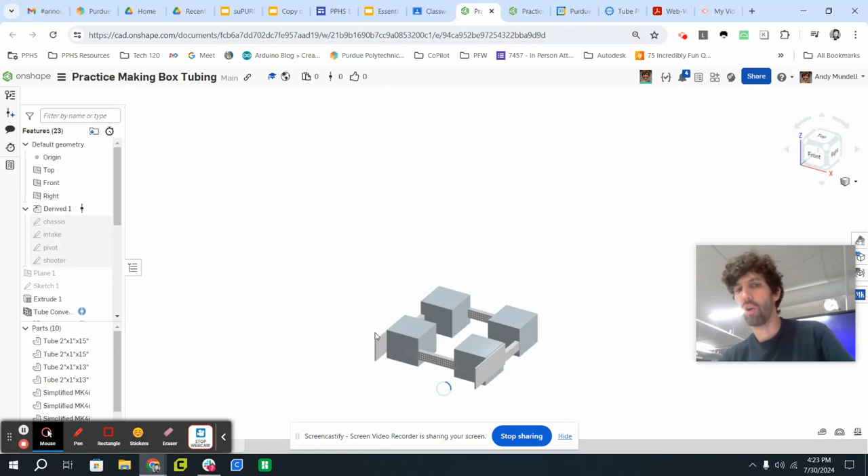So there's a starting file here, which you're gonna click to open. It'll take a moment to open. It's really a chassis that we made for the 2024 off season. Don't want you messing with this file because we're gonna have multiple people working on it.

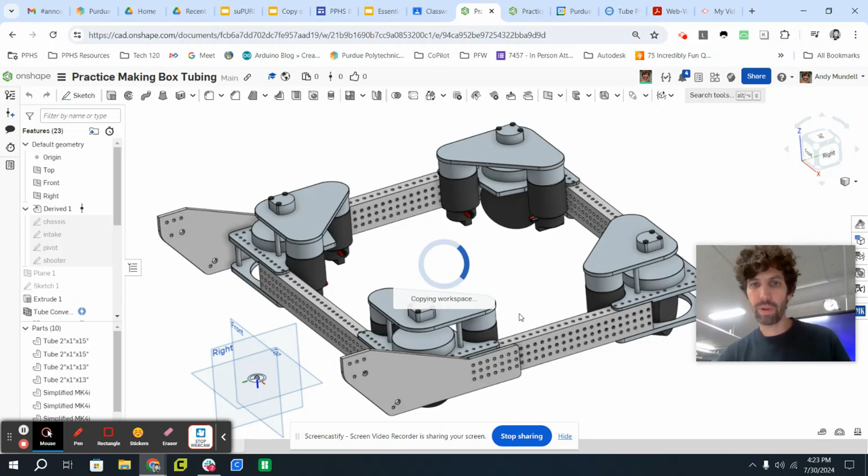So up here, you hit the hamburger looking thing and select copy workspace. And you can copy it, create it wherever you want it. I'll put it in the owned by me. Copy it right there. Once you've copied it, you should be able to edit it at that point.

We're going to make two pieces of box tubing. The first one is across the very front of the robot. It'll connect these three holes here in the front with these three holes across the other side. We'll make this out of 2x1.

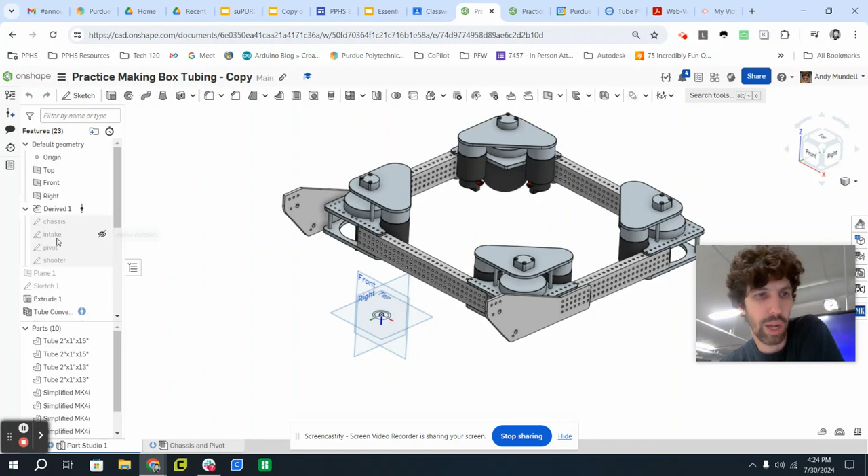The first thing I want to show you, though, is at the very beginning of the whole part studio, up at the very top, the first thing that gets done, you can see here, derived 1, is that 4 sketches were brought into this workspace. Let me go ahead and make them visible. Let me go ahead and hide all my parts. I'm going to right-click a part and select Hide All Parts.

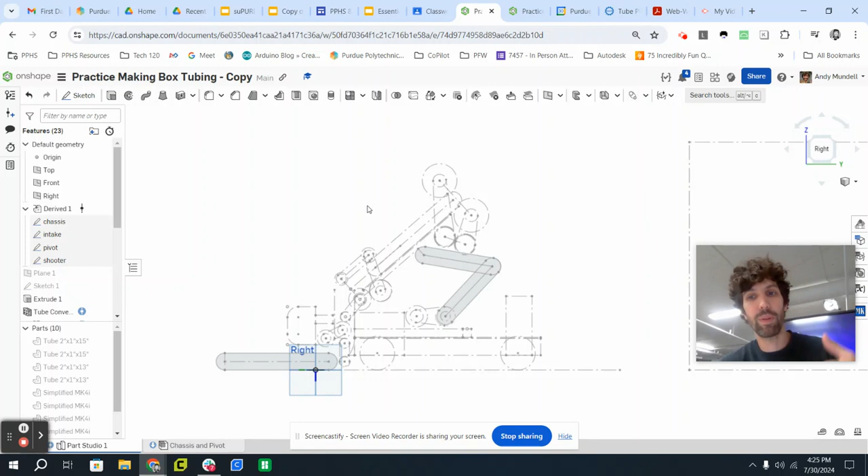So you can see these sketches were made after we decide how the robot overall will look. We'll create these 2D sketches which lay out where everything's going to be. This is really useful because that way all of our subsystems can use some of the same sketches. We can make sure they fit together. And if we want to change something, we can often just change the sketch. And if people have derived the parts off of those sketches, it should update.

So let me go ahead and show you these. We have a chassis sketch. Let me hide the others. Here's the chassis. You can see there's 2 wheels and sort of the shape of the robot. Here's the front bumper. Here's the beam that we're going to make.

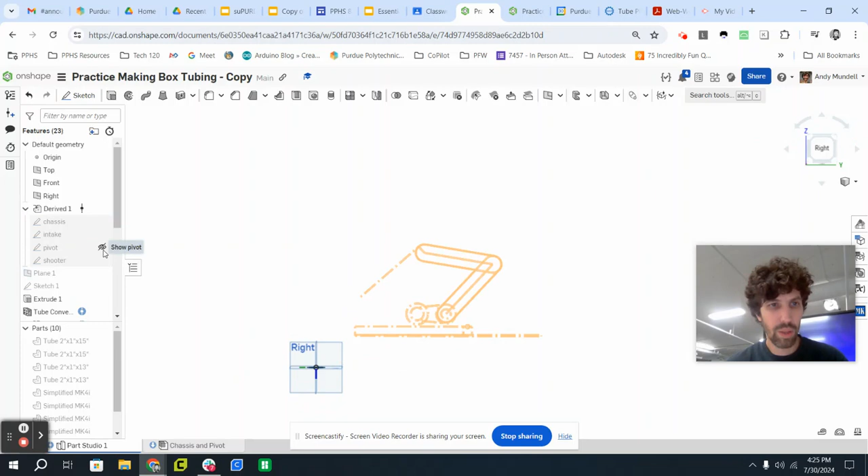Let me hide that. There's an intake sketch, shows you some of the geometry of our intake. There's a pivot where our shooter pivots on. And of course, there's our shooter. Let's just bring the chassis up here so we can see that. And then I will go ahead and bring all of my parts back. Let me right click and show all parts.

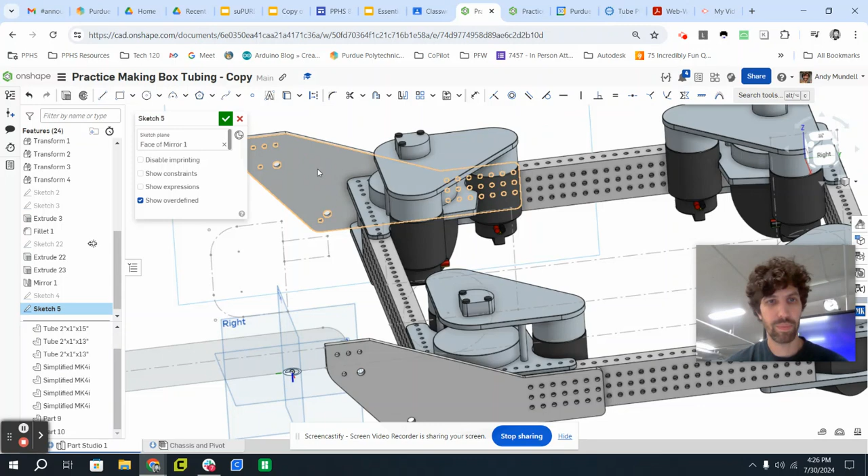There we go. So you can see that this part of the sketch represents a 2x1 box tube that's going to run across the front of the robot. So the way I'm going to build that is I'm going to leave this 2D sketch open. I'm going to start a new sketch on the front of this back plate. That's going to allow me to start drawing on that back plate.

You might think, oh, well, I'm going to draw this 2x1 box. I'm not going to do that, though, because I want it to be exactly where my 2D sketch is. So instead, I'm going to use this command, which is called use, project/convert. Now I'm going to project this line, this line right here, this line right here, and this line right here.

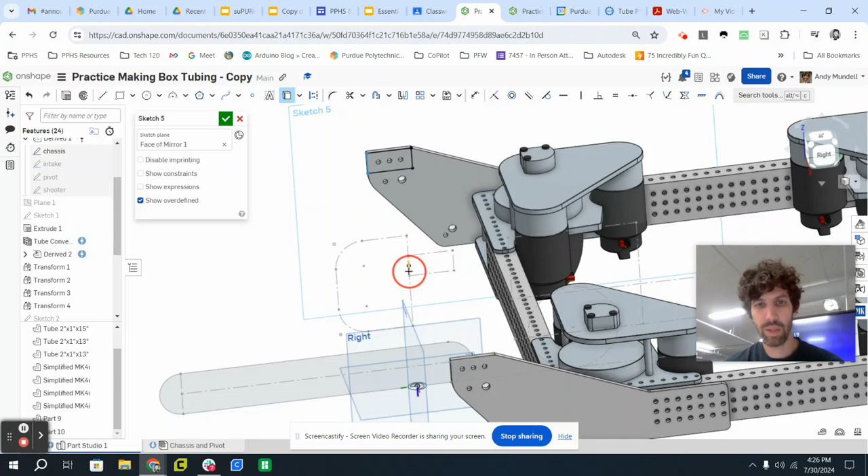I projected them. You can see they got projected onto this plane. Here's these black lines, which I've now used to enclose that area. And that way, if I later change the shape of this sketch, it will change that projection. I'm going to click the green check mark. I'm done with that sketch.

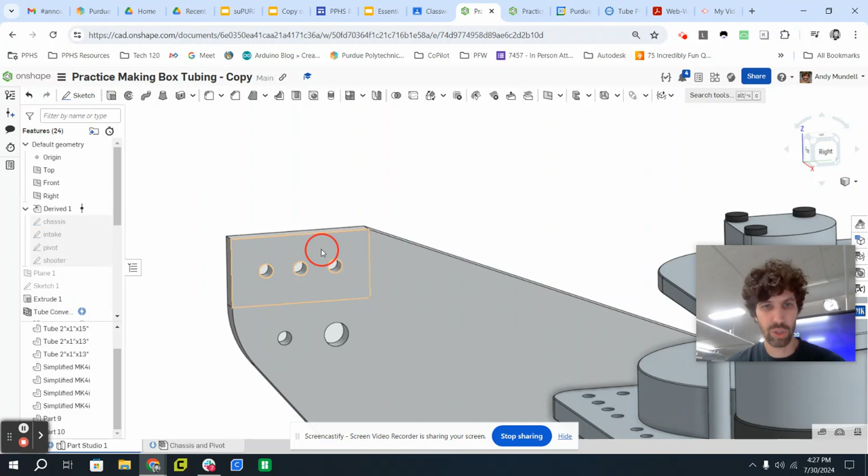At this point, I can hide my derived sketch, and I can just look at this piece I've got right here. This is what I'm going to extrude. So let me click that. I actually want to also select the areas inside these holes because I don't want to not project that area. I just want a solid block of 2x1.

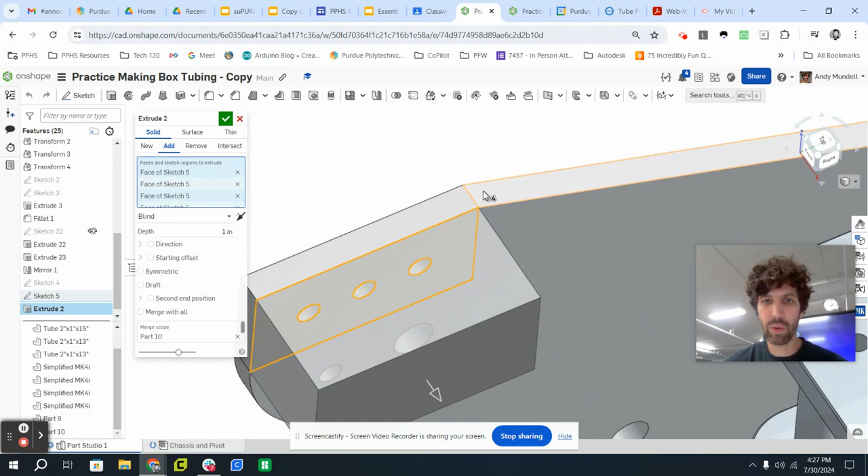I'm going to select extrude, and you'll see it'll start to extrude that block. If you have little holes here, it's because you missed selecting some of them. I want this to be a brand new piece. I don't want it to just be an extension of this plate. This is a whole separate piece. So instead of clicking add for this extrusion, I'm going to select new.

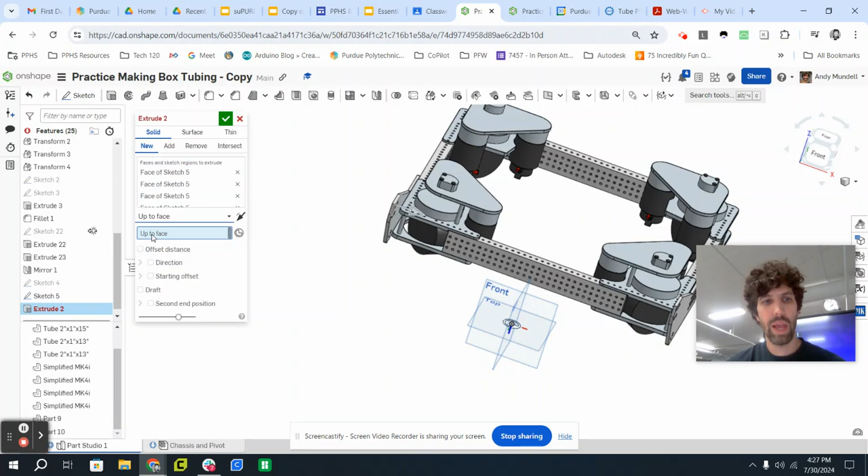And now how far do I want to project this? Well, I could measure this gap and say I want to project it 20 inches or whatever it is. But if I change my mind about how big this chassis is, I want it to change with it. So instead of just doing what's called a blind extrusion and saying the distance, I'm going to select up to face. And then I'm going to select this other side, this face, and it will extrude it up to that face.

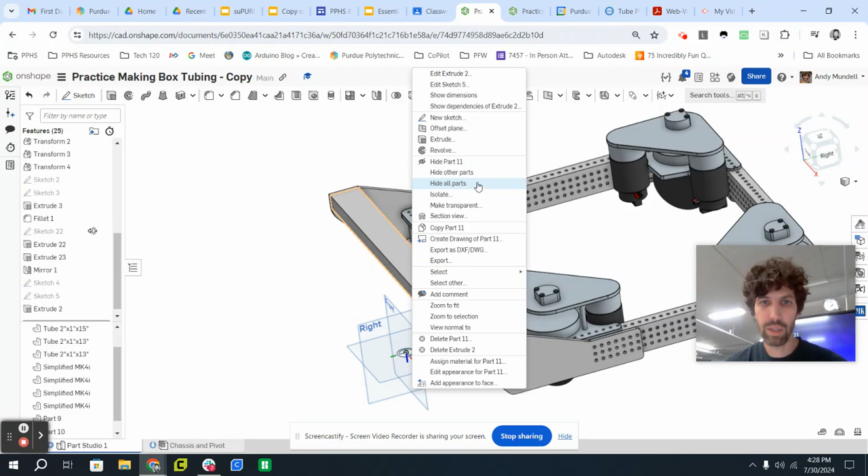And that's really convenient. If I go and change that later, it will adjust. Let me go ahead and click the green check mark. So here's my piece of aluminum box. Let me hide everything else. Right click, hide other parts. You can see what it looks like. It's 2 inches by 1 inch. It looks a lot like a piece of box tube. The main problem is that it's not hollow.

And this is where we can use what's called a feature script. Feature scripts are custom tools that have been designed by users of Onshape. And if I go back to the assignment here, you can see there's a file called Julia's feature scripts. Let me go ahead and open that.

Julia, I don't know what team you are from, but I wish I could meet you and shake your hand and thank you for some of these great feature scripts, because they've made our life much easier.

It'll take a moment to load up here because this file has a lot of great feature scripts. The one I'm concerned about is the tube converter feature script. Once it's taken a moment to load up, it's going to give me the option to add them. So you can see this is the code that Julia wrote. I am not a coder, so this is a little bit confusing to me. I don't need to know it, though. It works. I know it works.

I'm going to click plus on custom features. I'm going to scroll down to tube converter. I'm going to click tube converter. Now, for me, it said it was removed from your toolbar. That's because I already had it. For you, it would add it. So let's click it again. It was added to my toolbar. Great. So now I should have that feature script.

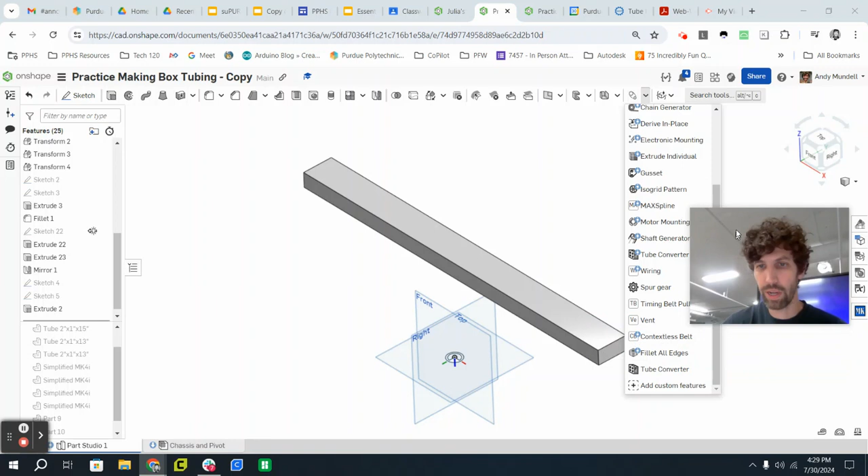Let me go back to my bar. So I want to turn this into a tube. I'm going to go here to my custom features, scroll all the way to the bottom. There's tube converter. You can see it's right here, tube converter. I'm going to click it. It's a custom tool for FRC. Bodies to convert. Well, that's going to be this body right here. Let me click it. Okay. You'll see it suddenly became hollow.

That's awesome. Wall thickness. It defaulted to 1/16 of an inch. I want this to be thicker, 1/8 of an inch, because this is on the outside of our robot, it could take some hits. So I want it to be a little bit stronger. I want there to be a hole pattern. I can take off the hole pattern if I want. Let's bring it back. And now I need to select some options about this hole pattern.

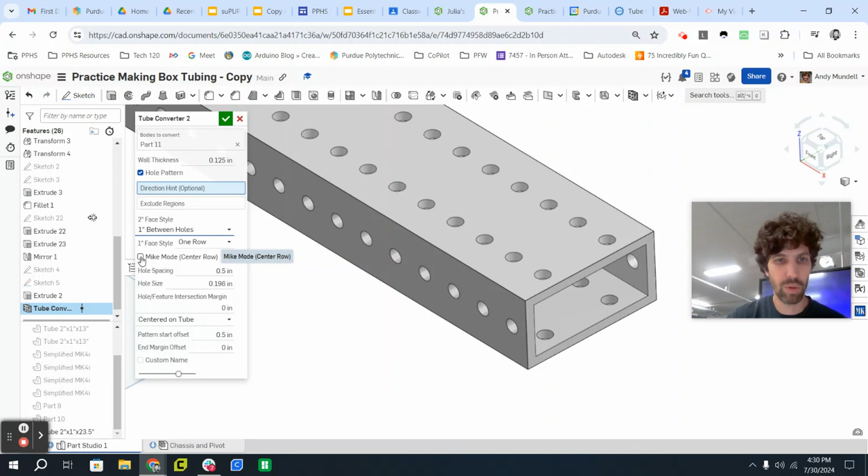On the 2-inch face, here we go. It says 1.5 inches between the holes. This is too far. We want 1 inch between the holes. Okay. And the other thing I want is a center row as well. So I'm going to check this box that says Mike mode, center row. There we go. This is very similar to the tube we have in our shop from ThriftyBot. You can also buy a similar pattern from West Coast Products, I believe, and maybe a couple other providers.

Hole spacing is every 1/2 inch. So they're doing a row of these every 1/2 inch. Hole size, 0.198. That's the size for a number 10 bolt. Sometimes we put 0.201 to give ourselves a little bit of clearance. Honestly, these tubes come with, I think, 5 millimeter. I could say 5 millimeter. They're all about the same size. They all work.

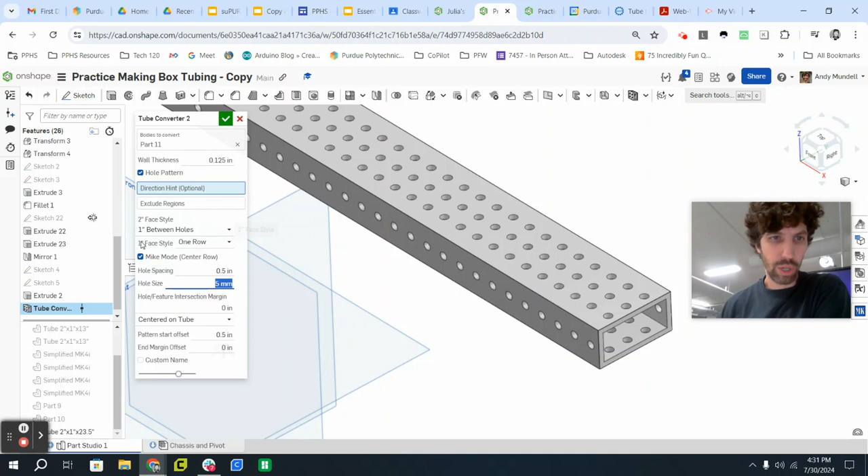But I just want to make sure all my settings are good. I can also adjust the 1-inch face. Right now it's set to 1 row. That's perfect. And then the last thing I need to worry about is the location of these holes.

Okay, so right now I need this hole here to be a 1/2 inch from the edge. And if I click right now, oh, it won't let me click because I'm in the middle. I can see that it's actually too close. It's a 1/4 inch. It did this because it tried to center the holes. You can see right here in the middle, it centered them. I'm not going to do that.

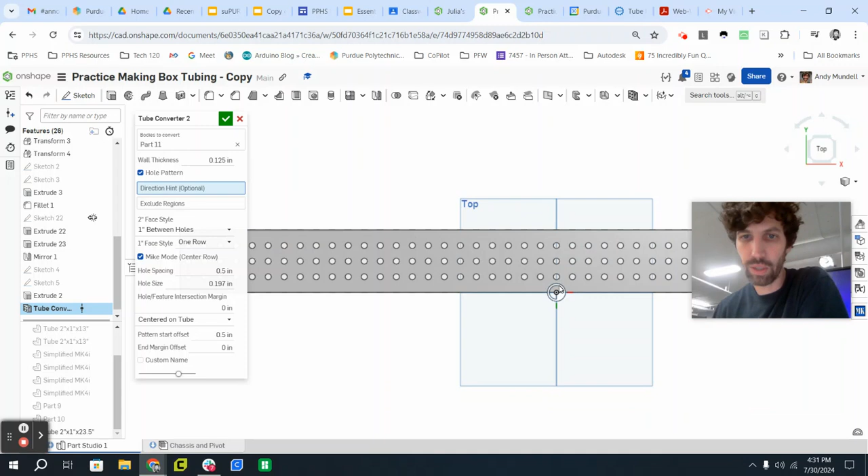Instead of having my holes centered on the tube, I'm going to select offset from the end. I'm going to offset them. I need to select the fixed face, which is this side here. From this face, I'm going to offset them 1/2 inch, 0.5. So you can see this is now a 1/2 inch in. I'm going to double check my other side. It appears to be a 1/2 inch over there as well.

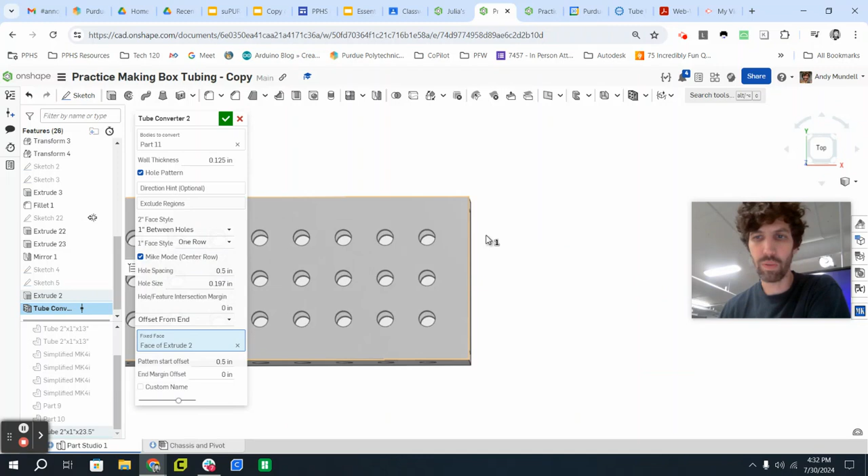This is important because I know how I'm going to use this tube. I'm going to put tube plugs in the ends, and they have a 1/2 inch depth. You can see tube plugs look like this. And the ones we use are a 1/2 inch from that edge. I'm going to click the green check mark. I'm all done. That tube looks good.

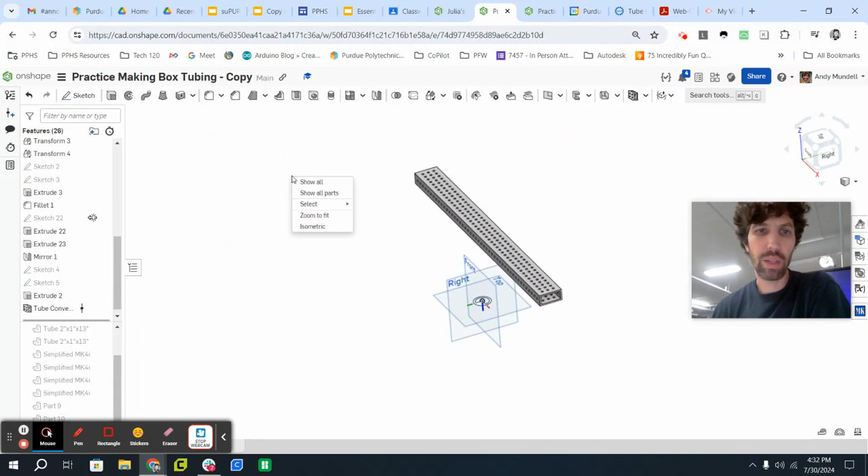Let's right click, show all parts. You can see we brought it back. That looks great. I'm going to be able to just put some number 10 bolts in here into the tube plug, fasten the tube plug into this piece of box tube. That's going to be nice and strong across the front.

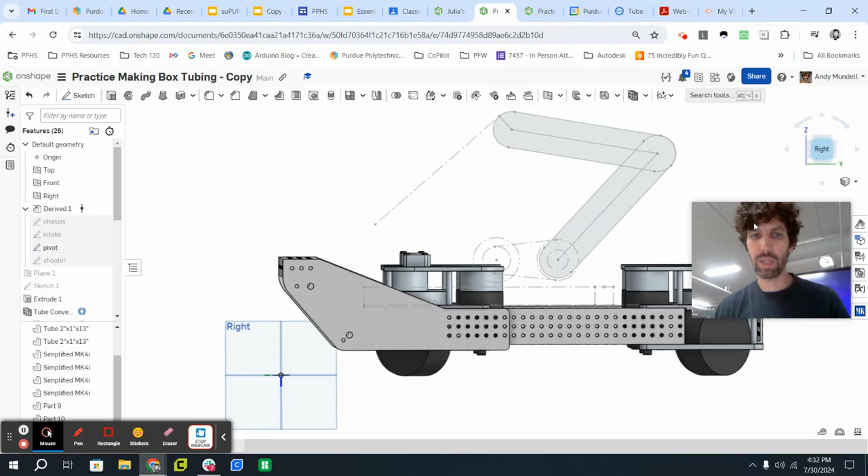All right, I'm going to do this one more time just to emphasize it. There's another tube that needs to be extruded here. It's part of the pivot sketch because it's one of the mounting pieces for that pivot. Here it is. It's a piece of 1x1 box tube. It's an 1/8 of an inch off of this edge because there is going to be space here for a belly pan, which is not yet modeled, but we'll do this tube first.

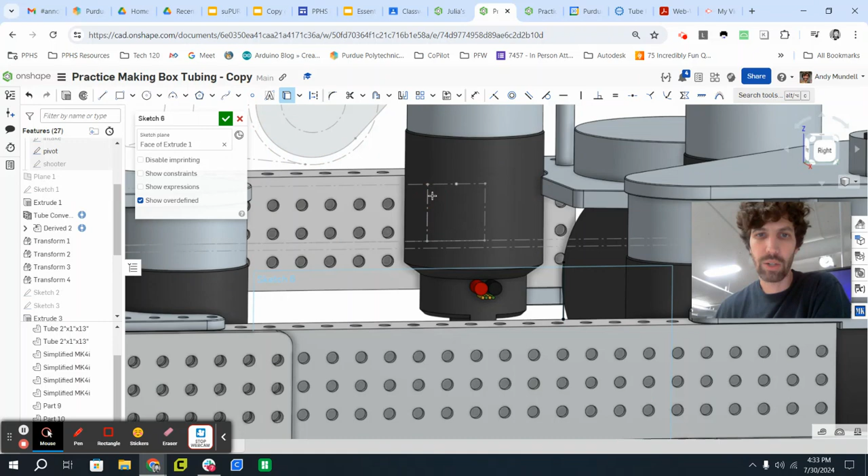I'm going to click Sketch. I'm going to sketch it along this wall right here. I'm going to select Use, Project/Convert, and I'm going to project all of the sides of this 1x1 box from my 2D sketch onto my sketch plane. You can see there it is. Let's click the green check mark. Go ahead and hide my derived pivot sketch so you can't see that anymore. Here this one is.

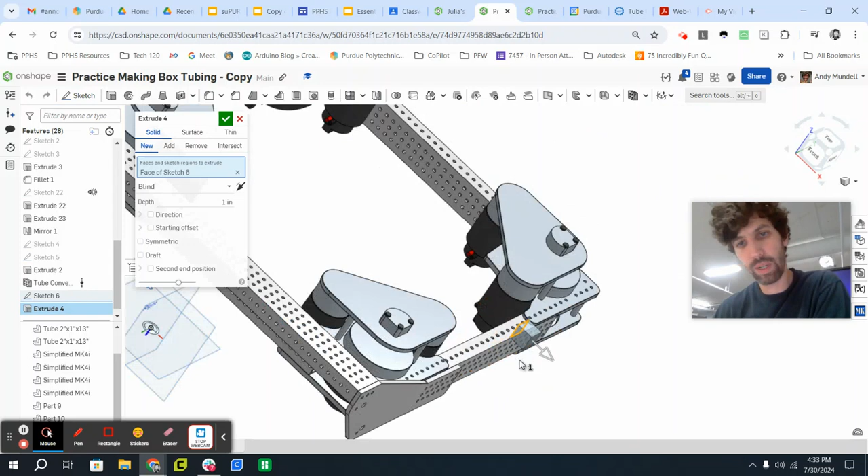Click it. I'm going to extrude it. I'm going to once again use the up to face trick. This time I'm going to take it from this side all the way across to the other side. So up to face. The face I'm going to select is right here. Perfect. That's exactly how I want it. Click the green check mark. And let me go ahead and select my tube converter.

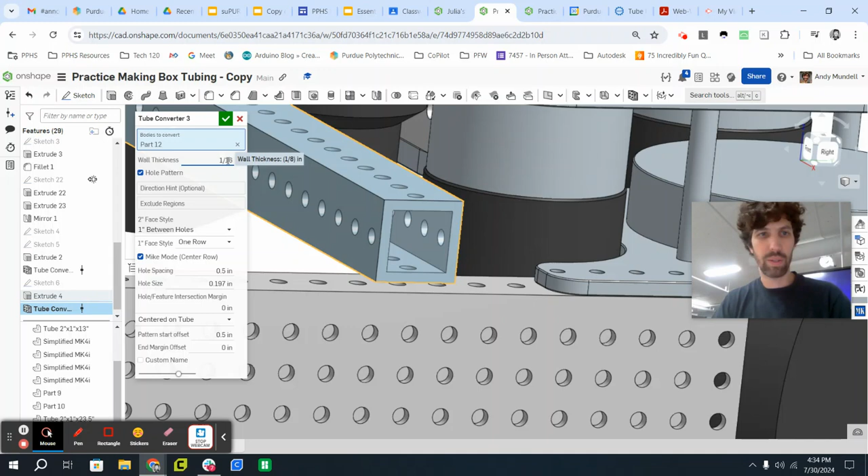Select my 1x1 tube. This tube I actually do want to be 1/16 wall because this is not going to be taking the same hits that my outside ones are, and we are worried about weight. The holes look good by default. Let me look from the top. Oh, no, they're not. See these holes? They don't line up with the holes in this piece. We need to be able to put a bolt through that. So it looks like these holes here, because they're centered, are too close to this edge.

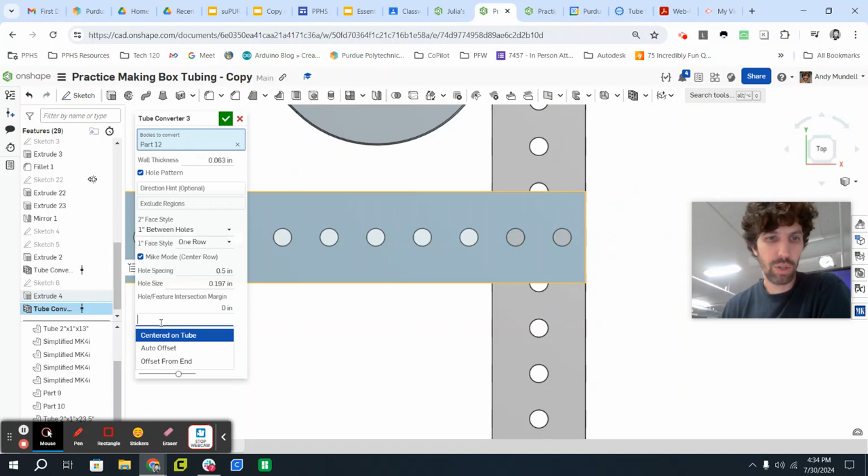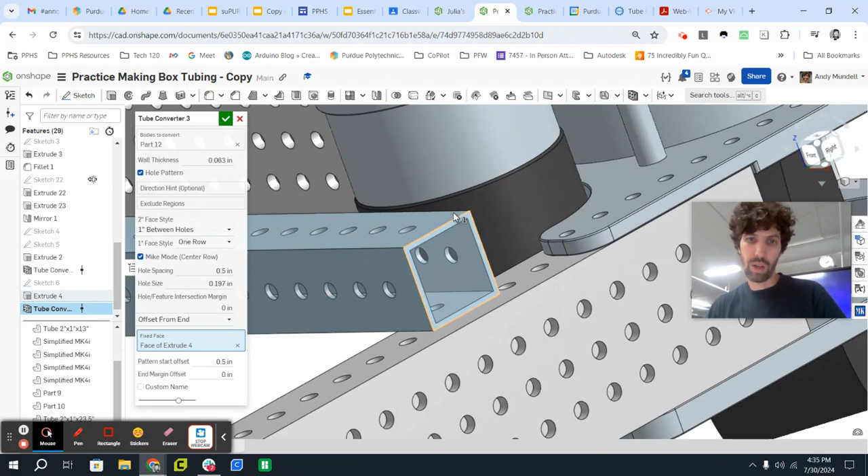Let me change it. Instead of centered on tube, let's do offset from the end. Let's use this as the end, and they should be a 1/2 inch offset. Let's look at it now. Yes, now my holes line up. So this is going to be able to get bolted to that bottom rail. Perfect. That looks good. Thickness is on. Click the green check mark. Everything looks good. There it is.

All right, that's how you use a 2D sketch to create box tube, as well as the FeatureScript to add the holes and hollow it out so it looks like a nice little box.